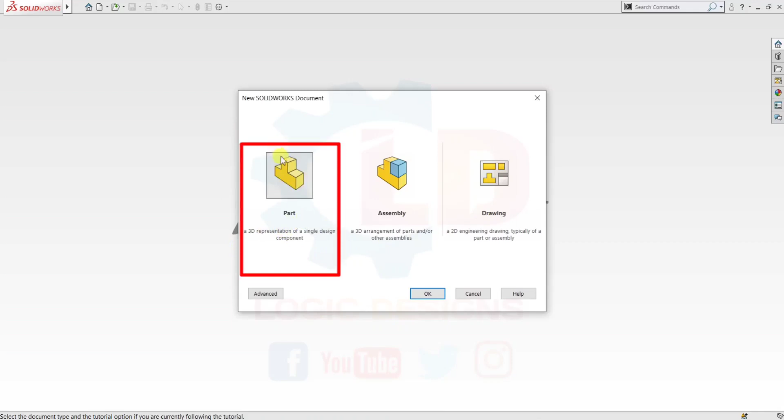So class, let's concentrate and get started with today's video tutorial. First, press Ctrl plus N to open a new SolidWorks document window. Here I am pressing Ctrl plus N. Now you can see the new SolidWorks document window is open. There are three options: part, assembly and drawing. We want part modeling, so select part, then click OK.

Click OK and wait a few seconds for the SolidWorks part modeling environment to load. Now you can see on the left side of the screen today's tutorial topic in front view and left hand side view. On the left side of the image is the front view, on the right side is the left hand side view. We create this object on the front plane. First of all, please read all annotations from this drawing. Here I am reading all the drawing annotations.

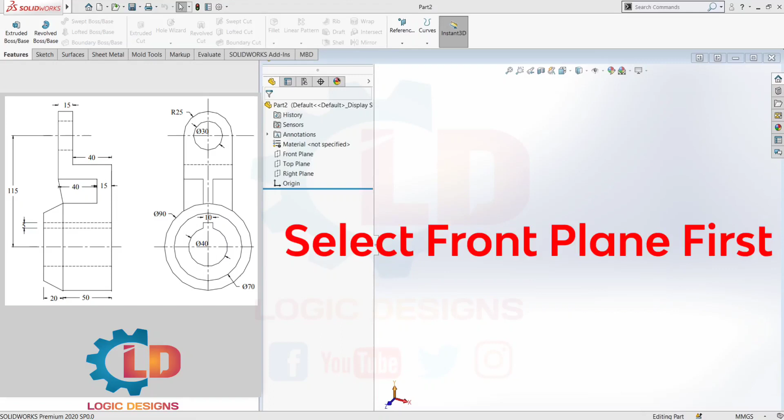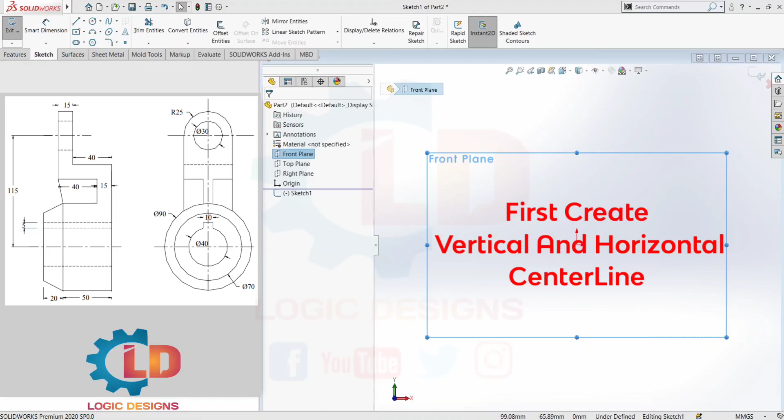First we create the lower part on the front plane by using the revolve command. For that, please note all annotation dimensions on a simple paper. For creating this lower part, first select the front plane for the revolve command. Now press the sketch option, then again the sketch option. You can see the sketch is activated. Now, to create this lower part, select center line and create a horizontal center line, then a vertical center line. Here I am creating the vertical center line.

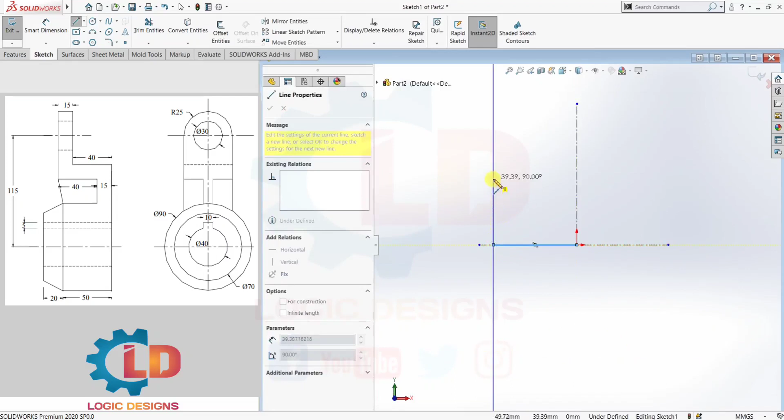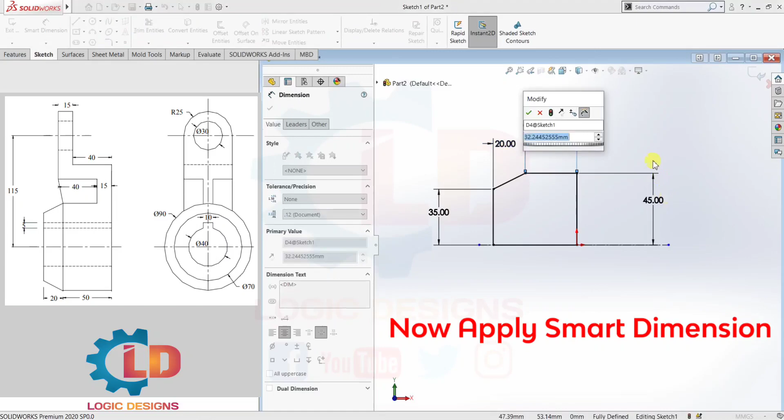Next, we need to create the lower part by using the line command. We are only creating half of this bottom part. First, create a random drawing. Here I am creating a random drawing of the lower part. Now give smart dimensions for this half portion: first 35 mm, then this side 45 mm, then between this corner point and this point 20 mm. Next one 50 mm. Now you can see the half portion is created.

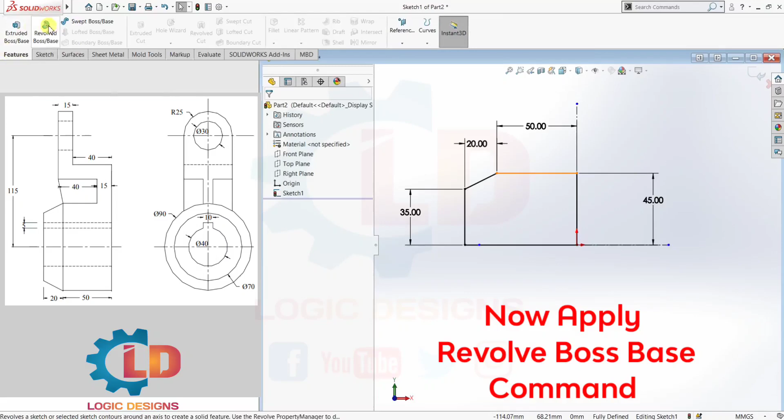Now we need the revolve command to complete this half portion. Go to features and select revolve. Select this contour, and select the axis of rotation, this center line. Now click OK. Now you can see the lower part of this 3D model is created by using Revolve Boss Base. In this tutorial, we are also covering the Revolve Boss Base and Boundary Boss Base commands, so concentrate.

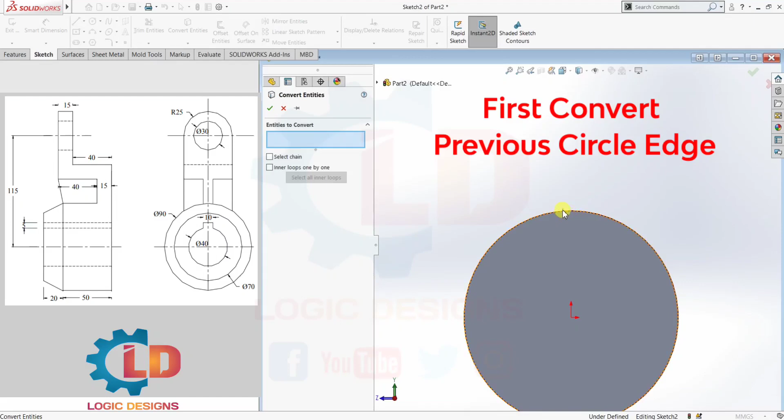Now create this portion on the back side of the lower part. For that, first go to sketch and select this back face or bottom face, then press Ctrl plus 8 for normal to. Now go to convert entities and convert this circle edge. Go to the center line option and create one vertical center line. Next, we need to create a half portion again by using the line command.

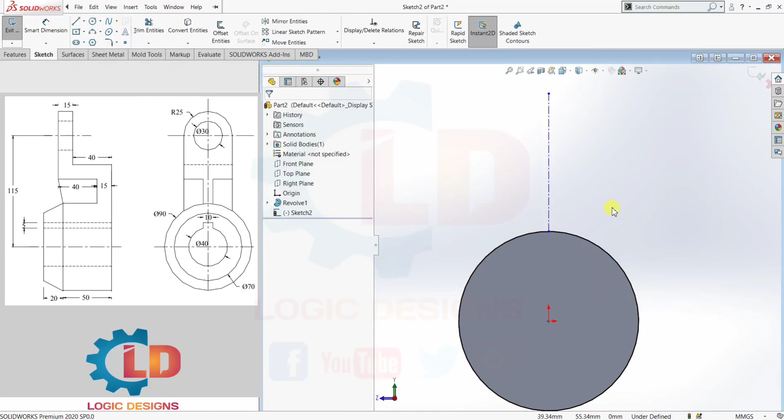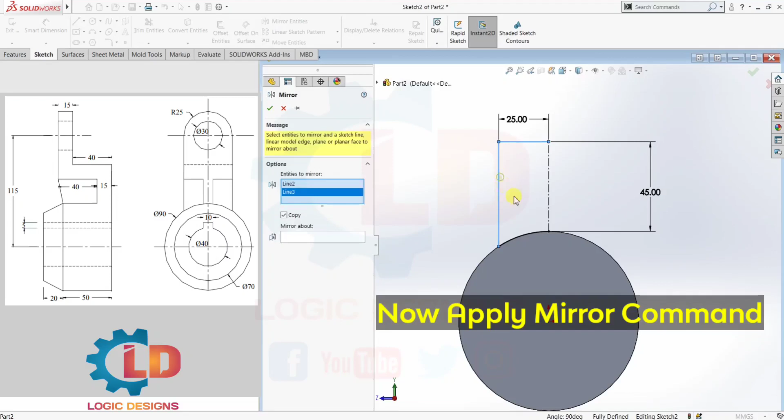Before that, trim out all unwanted areas. Then smart dimension, give 45 mm to the center line. Again line command, create some random lines. Now select smart dimension and give 25 mm. Trim out all unwanted areas first, then give a vertical relation from this point to the center point. Set vertical. Now you can see our sketch is fully defined. Now mirror this object to the right side, selecting this axis. Now we have the full portion of this drawing.

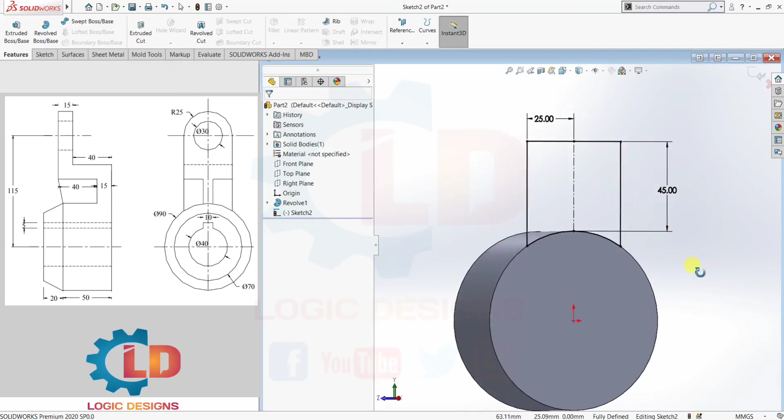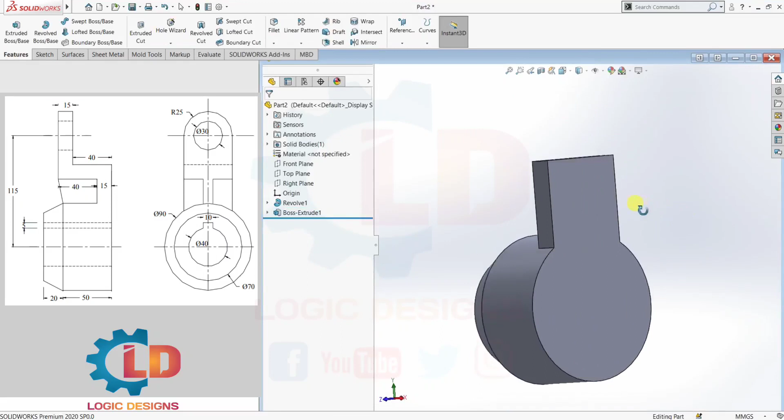Now give smart dimension 45 mm. Next we need to extrude this portion. For that, go to extrude boss base. Set the direction and give the dimension 25 mm. Here I am putting 25 mm. Click OK. Now you can see the portion is created.

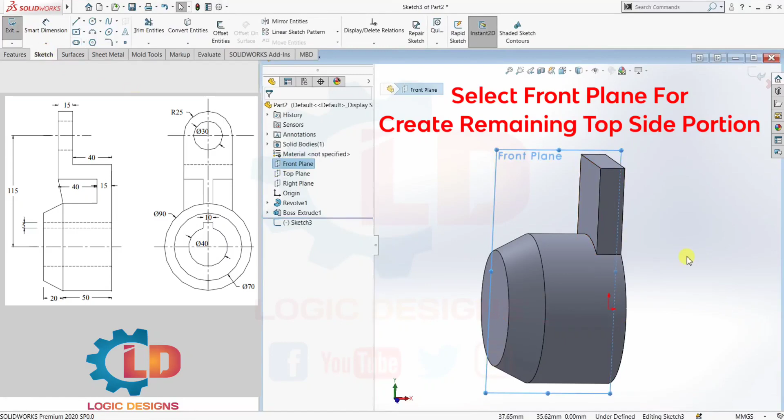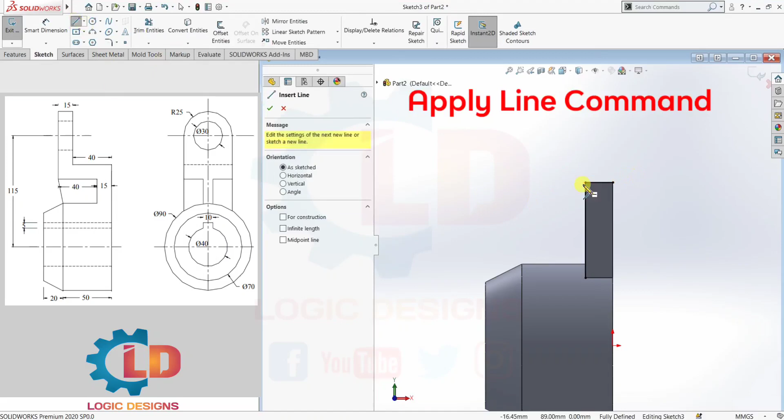Next, we need to create the upper L type shape on the front view or front plane. You can see clearly this upper portion on the front plane. Now select the front plane and sketch on it. Go to convert entities first and convert the required lines from the previous object. Next, select the line command and create some random drawing as per our drawing sheet.

Now next one, trim command and trim out unwanted area. Next, smart dimensions 15 mm first. Next one, 15 mm again. Again height 65 mm. Total height 65 mm. Now you can see here in drawing 65 mm.

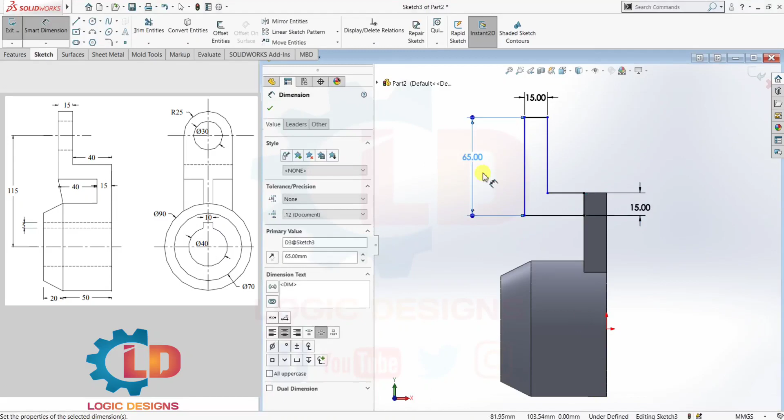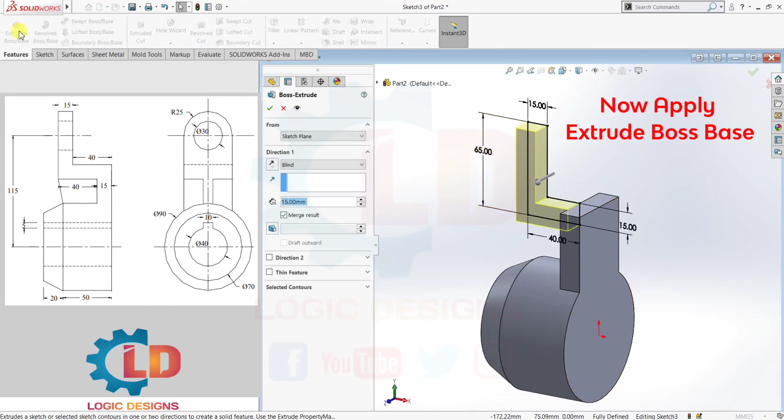And this portion is 40 mm. Okay, that's it class. Our sketch is now fully defined. Now extrude this up to 50 mm. Now go to the extrude boss base. Now select here mid plane and put here 50 mm because our object or drawing is on front plane, at a center point.

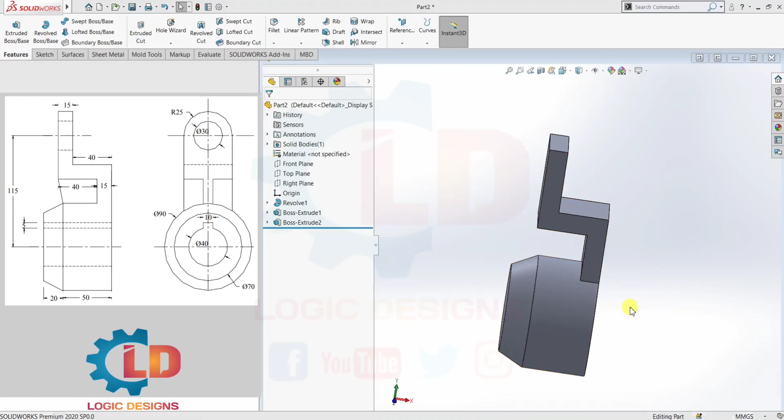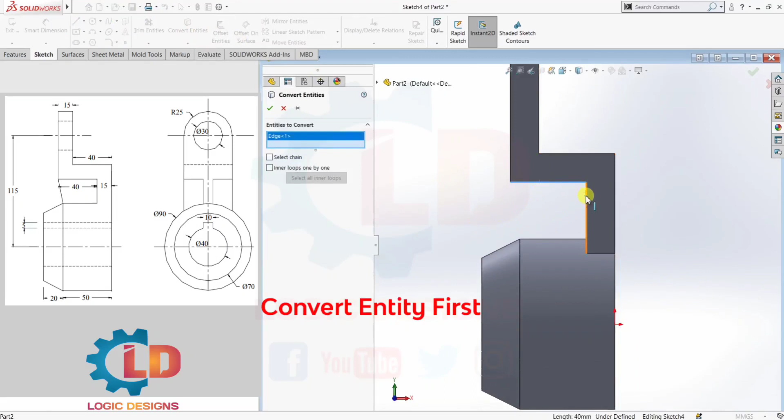Now upper part is also created. Now we need to create a rib between upper part and bottom part. You can see here clearly in drawing. So for that, first we need to go on front plane again, select front plane and go to the sketch. Now sketch is activated. Now press Ctrl plus 8 button for normal to. Now first convert entity and convert all lines from previous sketch.

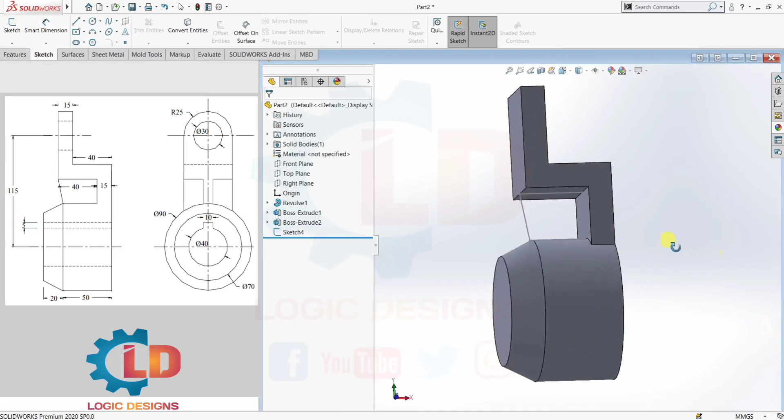Now we are using line command for angular line. Now you can see here our rib portion is created. There are so many ways to create rib in 3D modeling. So now we are using the boundary boss base for this rib, because the circular portion is present in the drawing. That's why we select boundary boss base option to create rib.

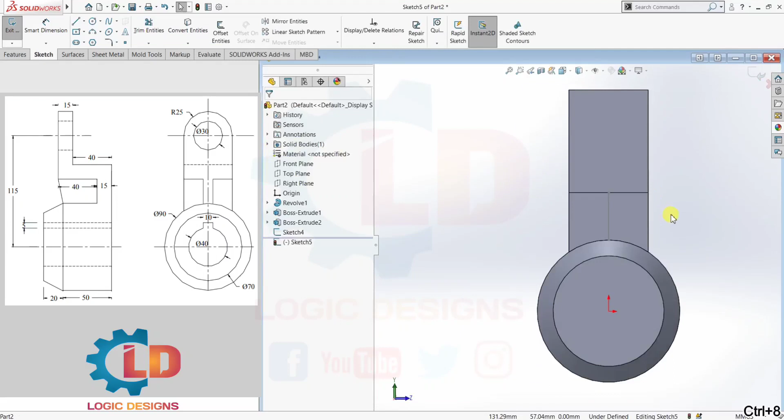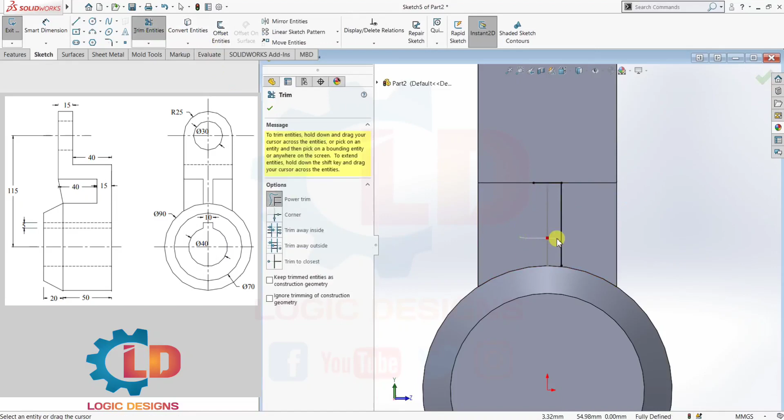Now go to the sketch option and select top face. Okay, now drawing on this top face. Now select convert entity option, select line. Next one, offset entity, select this line, bidirectional, and distance is 5 mm. That means total distance is 10 mm. Now trim out unwanted area or portion. Now smart dimension 10 mm.

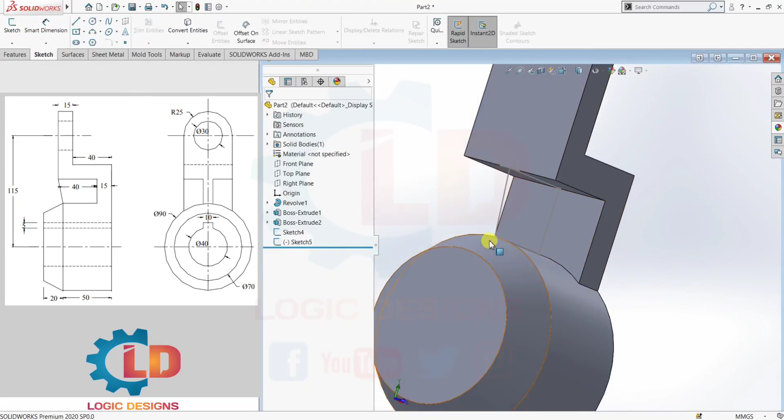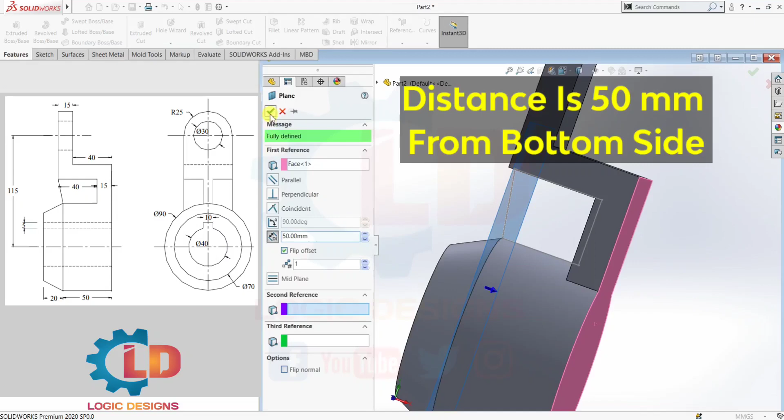Now next one, we need to create one plane for this circular object. Now exit the sketch, go to the features and create one reference plane. Features, reference, then plane, select bottom side, then flip offset, give dimension 50 mm. Now OK option. Next one, we need to sketch here, sketch, select this plane.

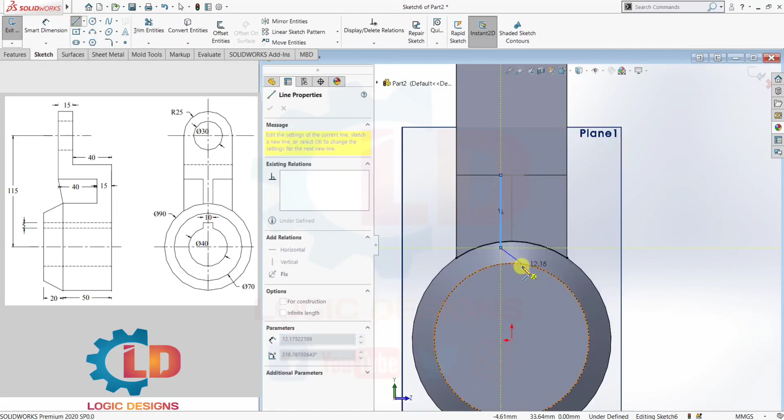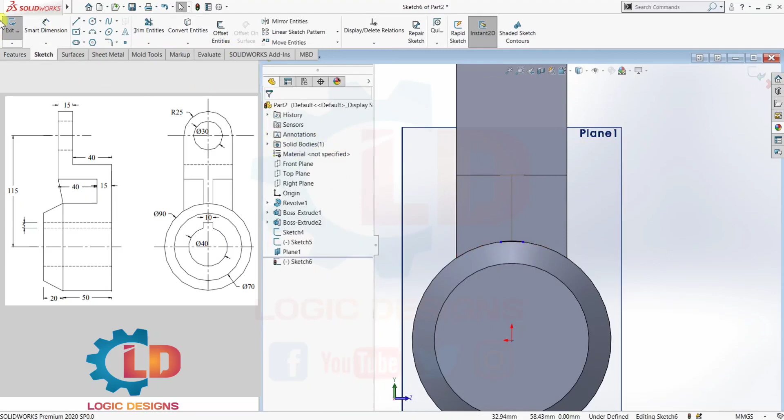Now convert this entity, select this edge, OK. Next one, we need to create line, two vertical lines. Next one, again one line. Now trim out unwanted area. Okay, now we got 10 mm distance upper side of rib. Now hide this plane.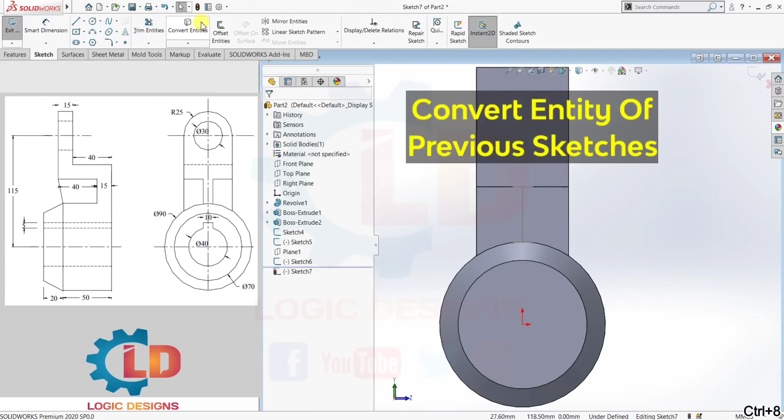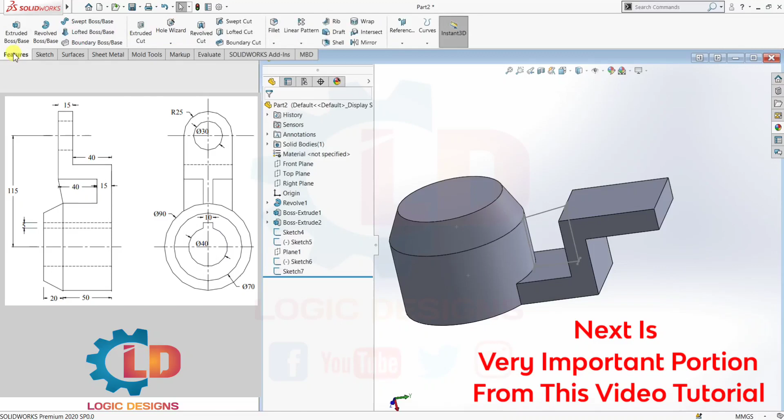Now next one, we need to convert these entities at bottom side. For that, go to the sketch option and select this face. Now select option convert entity to convert this 10 mm distance points. Now OK, we can see here all entities are converted. Now next one, go to the features and select boundary boss. Now concentrate here.

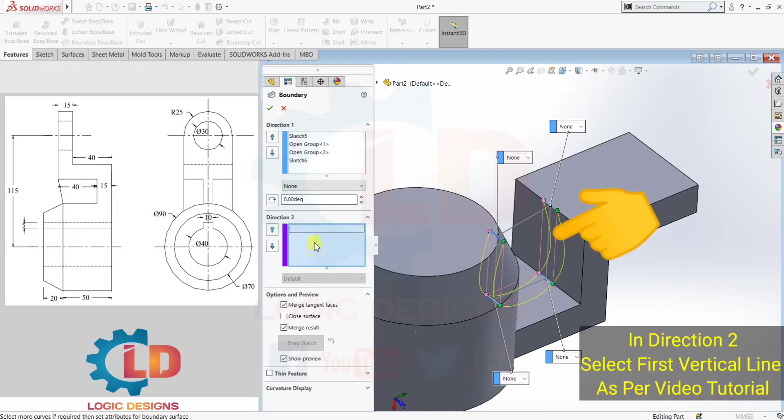In direction 1, select all 10 mm distance arcs. Select one by one. Select all 4 arcs. In direction 2, select one vertical line. Now you can see here our rib is created. First uncheck merge result, then click on OK. Now you can see here our rib is created by using boundary boss base command.

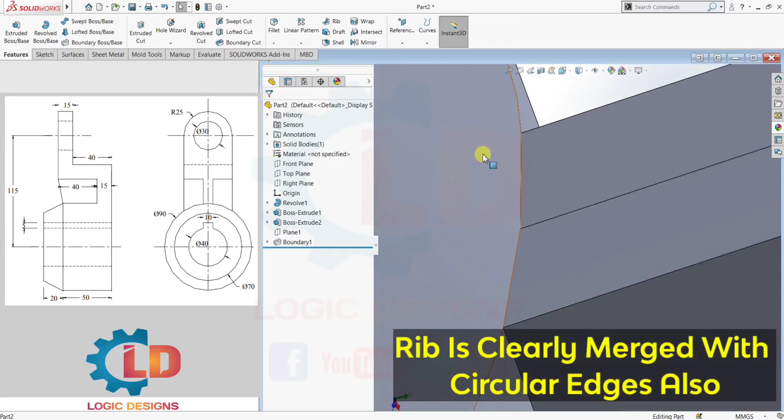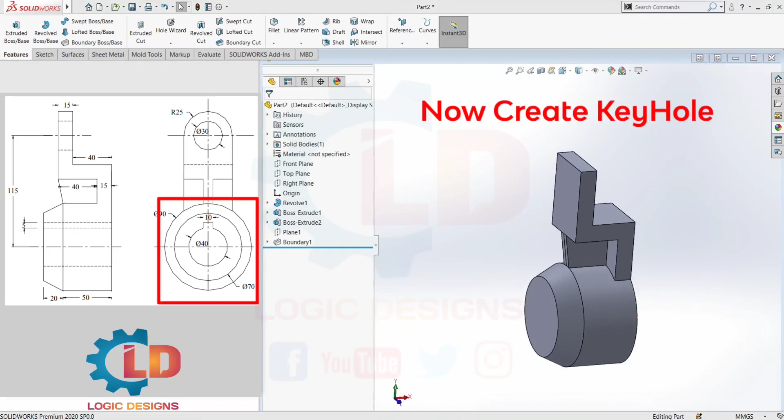Now you can see here the rib is accurately touched with circular part of this 3D model. This is the most important part from this video tutorial. Now next one, we need to create this keyhole. For that we need to select sketch and this front face. Now Ctrl+8 button for normal to.

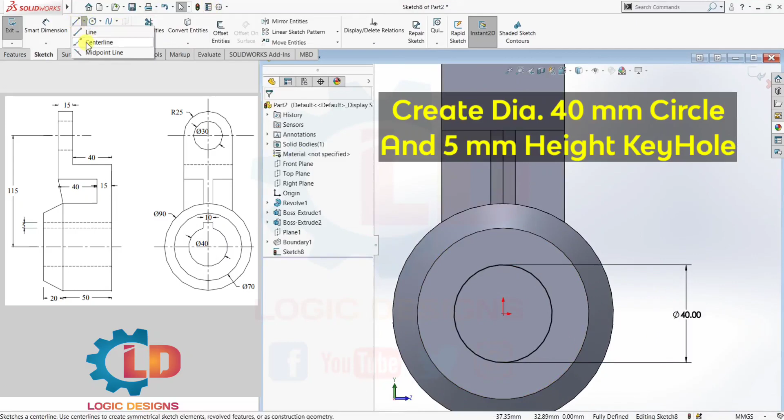First create one circle of radius 20 mm. Put here 20 mm. Now smart dimension, give this dimension 40 mm diameter. Now next one, create one center line. Now create again line at a horizontal side. Now create these random lines. Put here 5 mm distance and vertical line 5 mm also.

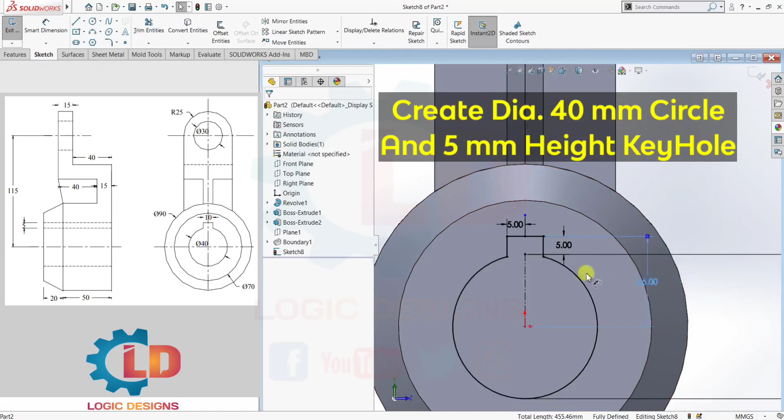Now next one, we need to trim out all unwanted area. First mirror it, set center line for mirror. Now trim out. That's it. Now put here extrude cut option from features. Adjust all dimensions first. Now next one, features and extrude cut. Extrude through all whole part. Now you can see here keyhole and keyway is created.

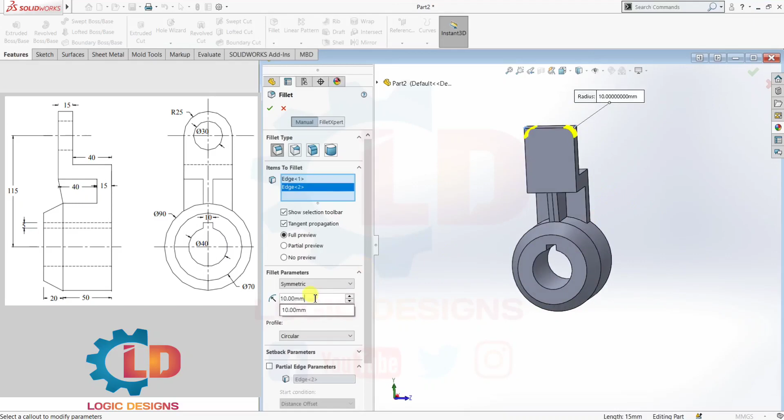Now next one, we need to create a fillet of radius 25 mm. For that, go to the fillet and select these corner edges of both sides. Now put here radius 25 mm. Now we got the fillet of radius 25 mm both sides.

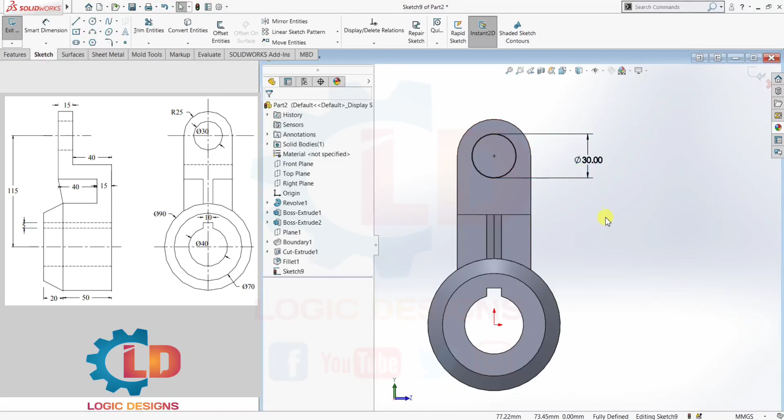Now next one, circle of 30. Now go to circle, select center point of previous fillets, put here 15 mm radius. Now smart dimension, I put over here 30 mm. Now go to the features, then extrude cut. Now okay. That's it class. This is our today's 3D model.

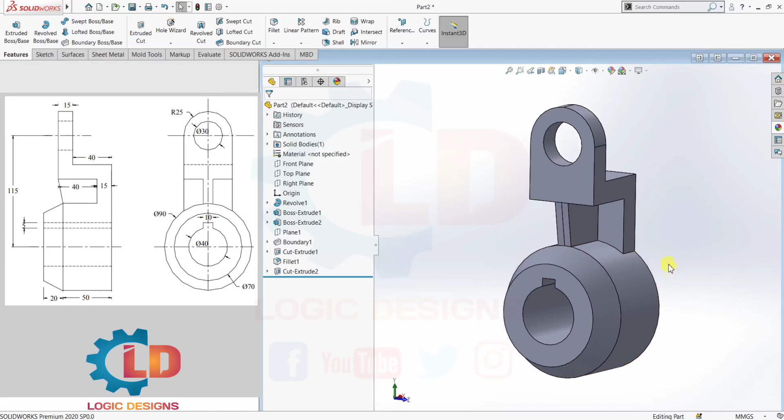I hope class you have enjoyed this video tutorial on how to create rib by using boundary boss base. Now go to the orientation and select four view orientation. Now you can see here front view, left hand side view, top view and trimetric view are displayed as per our drawing sheet.